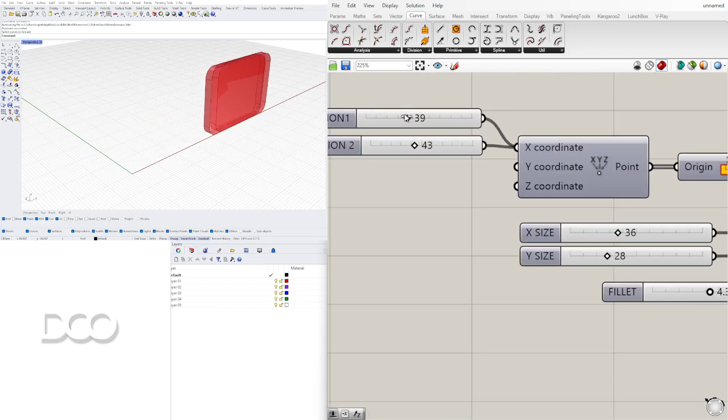In this video, I'll be showing those that have never used Grasshopper before and are intimidated and think it's a little bit scary, how to use it. I'm going to go over these super basic scripts and show you the power of parametric architecture and how it can be a super powerful tool for designing, and to see all of your options when creating 3D models. Hopefully you find this useful. If you see anything or have questions critical to this tutorial, let me know. This is something I want to build upon and share with other people to get them started so they can become familiar with the process of parametric design and architecture.

To start, I want to talk about the fact that the more knowledge you have inside of Rhino in terms of modeling or drafting, the better you will be inside of Grasshopper, in the sense that all the things you see here, like creating a line, a circle, a rectangle, are available inside of Grasshopper also. But if you don't know how to use them inside of Rhino, it's a little trickier to understand how to get them to function inside of Grasshopper. That doesn't mean you can't play around inside of Grasshopper and learn new things that you can then translate into Rhino. So it kind of goes both ways, in the sense that one thing you learn on one side helps you understand 3D modeling in general a little bit better.

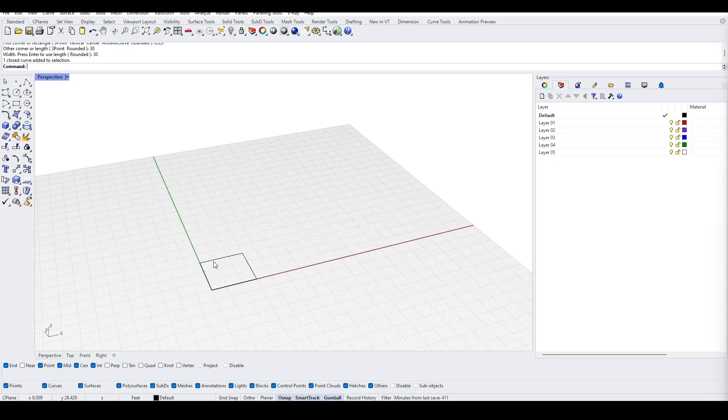So I'll take this and use the gumball. If you don't have that on, click on this and you'll be able to drag that arrow to move this to the side. Now we can go into Grasshopper mode, and let me show you how to create this rectangle here inside of Grasshopper.

To open up Grasshopper, go inside of Rhino and on the command bar type in Grasshopper, or you can go to this button here that launches Grasshopper. Once you do that, you'll see a file and there will be some default files for you to open. Just go ahead and go to File, New Document, and you'll see something like this. Now, as you can see, we basically have an open space, but this is different than what we see inside of Rhino.

We don't have a coordinate system inside of Grasshopper. All we have is this blank space, but this is going to function as the logic of the buttons and icons that you see in Rhino. They're created here, and this way it can be created parametrically.

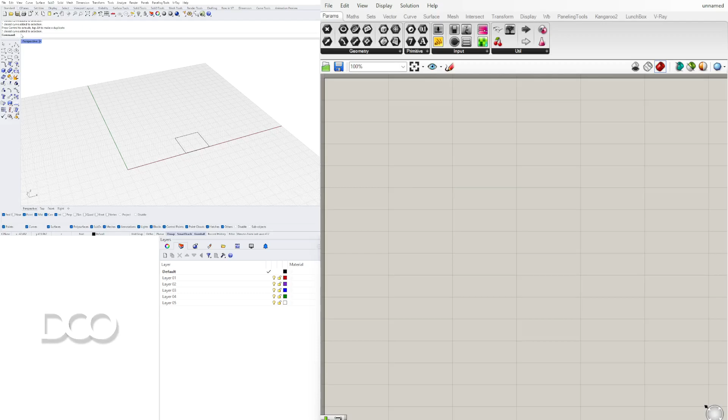So the first thing we do, in the same way we did it in Rhino, is double click, which is the way you basically type in a command. In Rhino, you type a command or click a button; here, the way to do that is double clicking on the blank space. Now we can type in rectangle, and I can bring in this rectangle component.

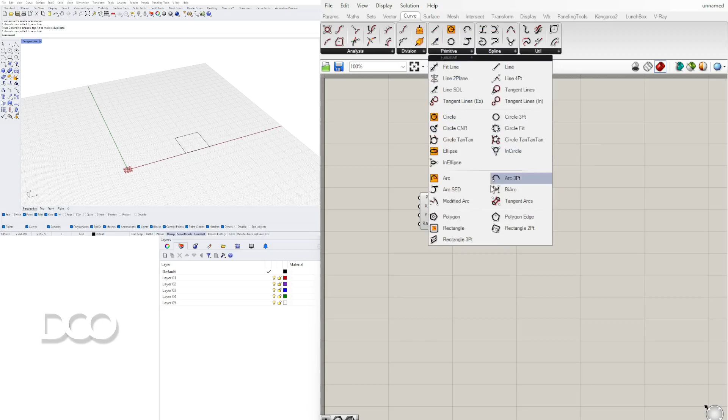Or I can cycle through the different tabs, which give us different aspects of geometries and transformations we could do. We want to look for curve, primitive, and rectangle. So in the same way that inside Rhino we can look for an icon and click it, or type in the command, here we can double click and type the command, or go into a tab like curve—two-dimensional curve—primitive, meaning the basics, and rectangle, which is going to be this component.

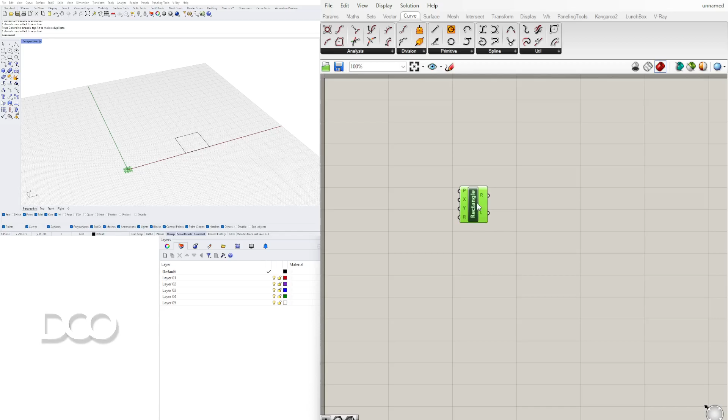Now there are different ways to view a component. First, I'll disable all of these, and you'll see the component just says the name and has one letter for the input and one for the output. This is okay, and sometimes necessary, but in my opinion the best way to display it is enabling all the draw icons, fancy wires, and full names. This way you can actually see the icon of what you're doing, and get a bit more information for the input and output.

Now that we have this component, notice we have these inputs and outputs, the same thing we have when we click on an icon. We have inputs, which is the plane—this is the location base plane, asking where we want to place it. Grasshopper by default will give you a default plane, the XY coordinate system, the same as the coordinate system inside Rhino. So the X and Y are the same that are plugged in here.

Now we can change that—we can bring in an XZ plane inside Grasshopper and change the plane, but by default it'll put it here. Now we want to change the size. Remember that for this rectangle we did 30 and 30, so let's do that here.

Now to plug in inputs, we can either right click, set domain, and change the size, or we can bring in a slider. A slider is really important here for parametric design, because it gives us a range of numbers we can change. So if we have X and Y, let's plug in 30 for X and 30 for Y.

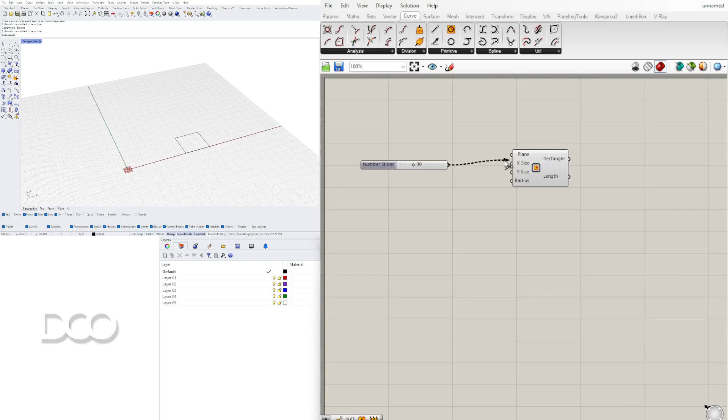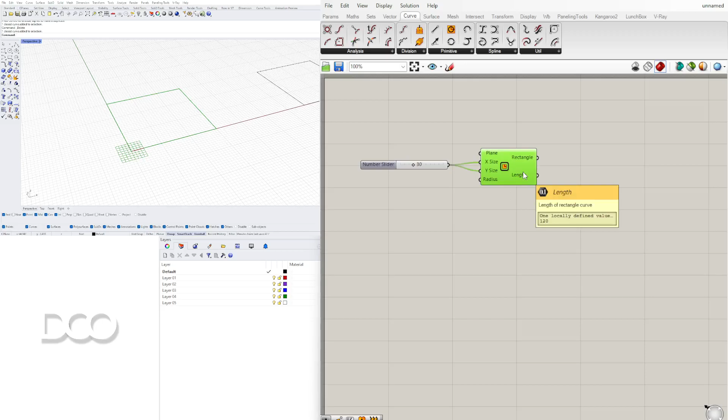Notice that we've basically recreated that rectangle here inside Grasshopper. The only difference is that when you select this, it turns green, and when we go to our Rhino file and look in the viewport, try as hard as I can, I cannot select it. This is because when you've created it parametrically inside Grasshopper, technically it's not a completed object, in the sense that it can always change.

So think of it as clay. Clay can be molded until it's baked, and once you bake it, it turns into the form it's supposed to be, where it won't be able to move.

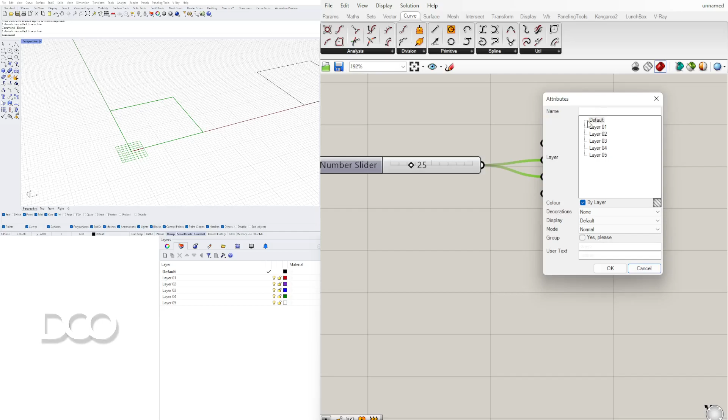So this is the same thing that we do inside of Grasshopper, where let's say I have a size of 25 rectangle. I can click this, middle click or right click, and bake. Then it's going to ask me which layer I want to put it in. I'll just put it in the default layer. And you'll see that now I can actually click it and move it. That's the power of Grasshopper, that you can bake iterations. So now I can just move this around and then bake it, and move this around and bake it, and just have iterations of different options just by moving a slider.

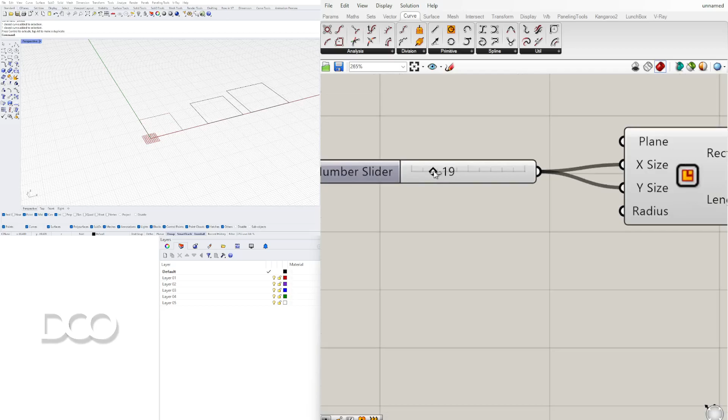So that gets you started with how Grasshopper works, in the sense that I just wanted to show you how components are brought in, how components work in relation to Rhino. From here, there's a lot more to be learned, in the sense that there are a lot of different components, and a lot of different ways to create numbers. But this is kind of getting your feet wet and not being scared or intimidated by parametric design, because in my opinion, it's one of the most powerful tools that anyone can use. So hopefully you found that useful, and I'll see you on the next video.

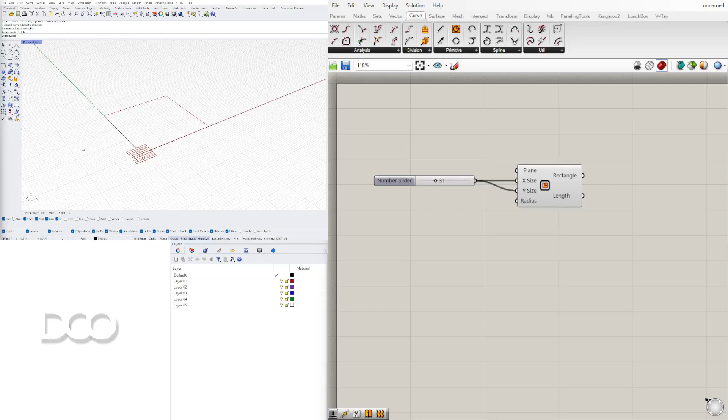So going further with this exercise, let me show you the next things we can do. Now that we have brought it in, we have given it an X and Y size. Now let's change the inputs. Rather than just one input for the X and Y, let's copy this slider and create a different Y size.

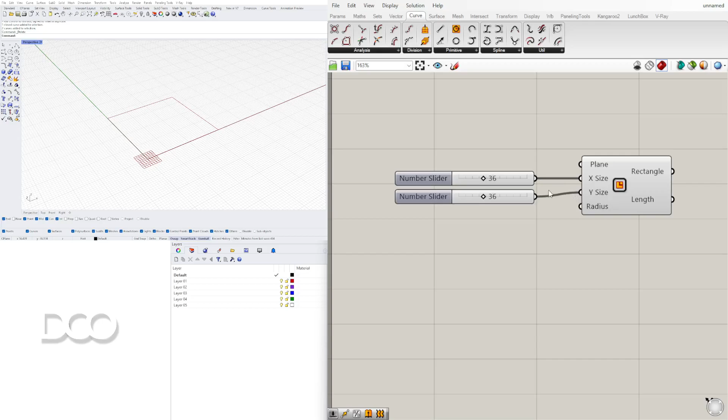You can take the slider, Control C and Control V to create a copy. You can also drag this down here and then tap Alt, or Option if you're on a Mac. This way you get two sliders, and we can now plug that into the Y and have two different dimensions for the X and Y.

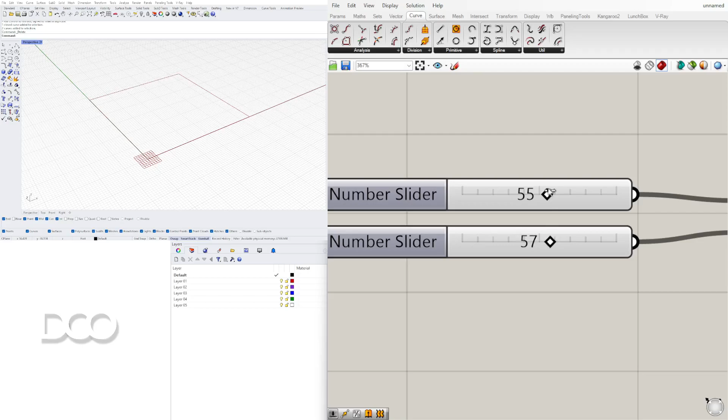You can also change the maximum and minimum if you want to limit the size to a specific amount. But now that we've created the size of this, let's change the name on the slider so we know what this does. Now that we have the slider of 35, we know that's the X size. So we can right click on top of that and change the name, type in X size - I use caps, but that's just a personal preference - and I'll do the same here for Y size.

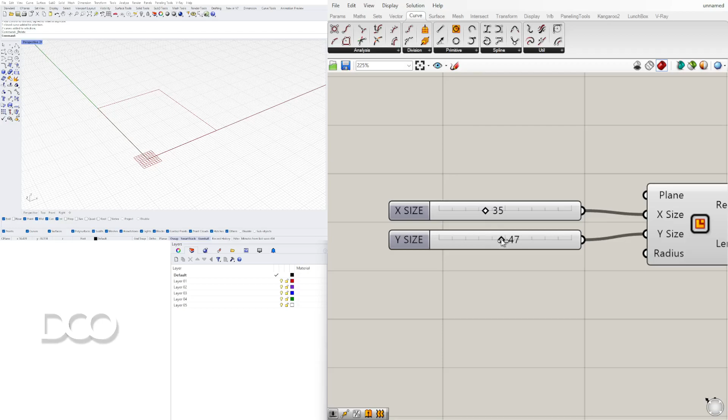The other thing you're going to see is that when you bring in components, you don't have to use all of the inputs, but there are some critical inputs that you need to use for the component to work correctly.

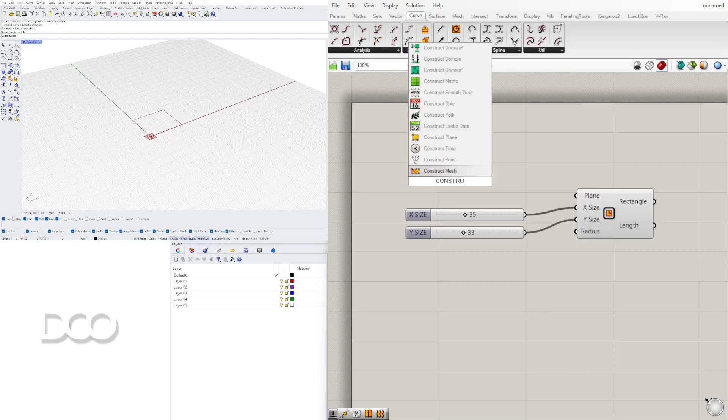So what I do is, for this one it gives you a plane, world, X and Y, but we can change that location. Let's say you have a plane, X and Y, and we want to move it to X, 70. This is where we'll create a point. So I'll double click here and go to create point, or we can go to construct point. This way it's going to create a point, but it's going to ask us to input the X, Y, and Z. So we know that we want to move this in the X direction.

And this is important, very important: be aware of your coordinate system. This is positive X, this is positive Y. So we want to move it in the positive X. This is where we'll take a slider and create it here. So we'll double click here, go to 70, and plug that into the X. And as you can see, it creates a point at that location.

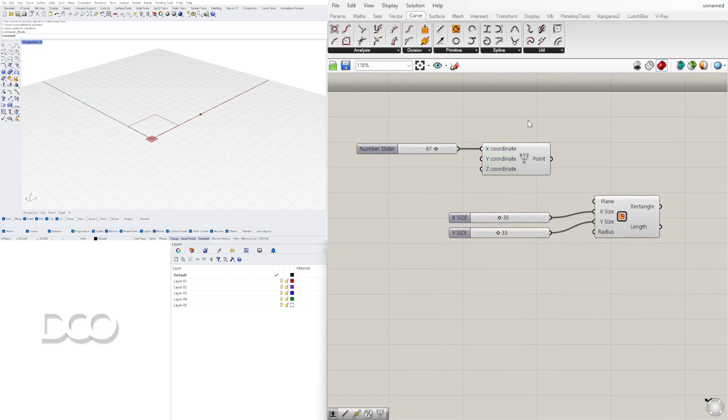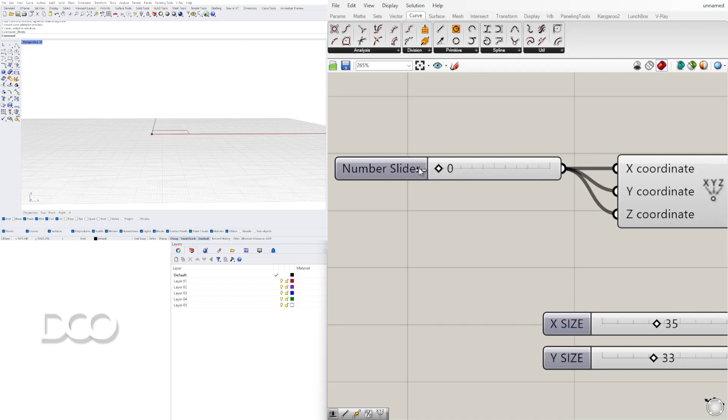Now we can plug in that point into the plane and see that we've successfully moved it in the X direction. Now if I plug in both X and Y, you'll see that it will actually move it diagonally, because when you have X and Y, it's actually a slope. And in the same way, if you do a Z, it's actually moving it up in that direction. So this is how you can change the location of this plane by changing the input of its location.

Now, this point - say we move it here - but it says X, Y plane. Why don't we change it to a plane that is X, Z?

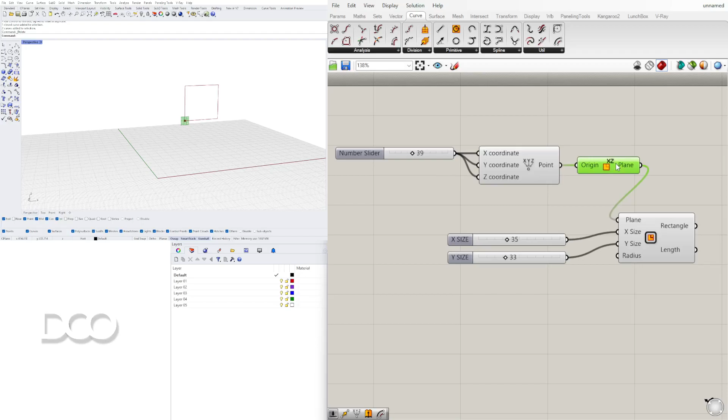So if I double click here and bring in a component, X-Z plane, we'll see that this component has one input and one output. The input is the origin point we created earlier, and it creates a plane that can be plugged into this plane input. Notice that it's actually created not relative to the ground or the X-Y coordinate system, but off of the X-Z coordinate system, which is a component. So every component, we can use this reference plane as an input.

So I just wanted to show you some of those aspects of basically referencing multiple planes and changing the location of that.

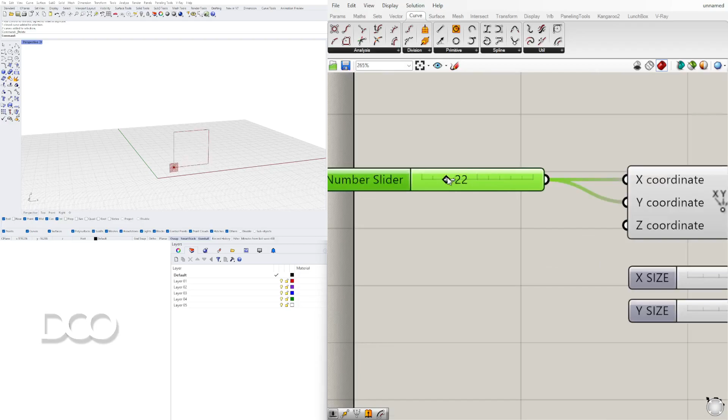So at this point, what we've done is change the origin point. We can unplug components, inputs and outputs, by bringing this back out and holding down Control, and you'll see a negative sign, which means it will remove it. Now it only has the X and Y. We can remove the X and just have this.

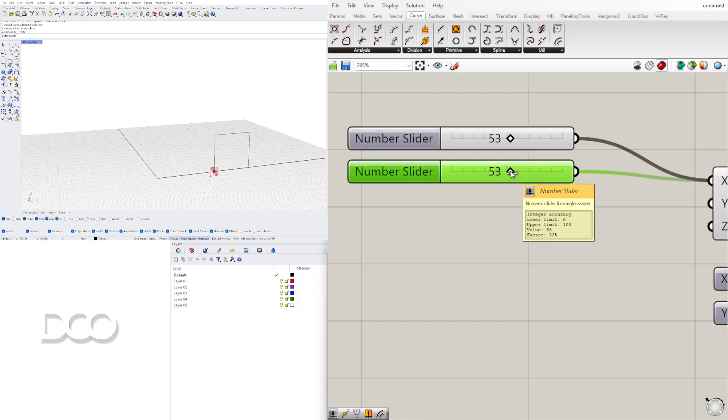Now, in the same way that we have one input in the X, let's say we want to take this and create two rectangles. We can copy and paste this, and holding down Shift, we can add more inputs to one input, which means we can create two rectangles by putting two inputs into the point that then creates the reference plane that is then creating the rectangle, which we can change the size of. So all of this is tied together parametrically.

And lastly, for this exercise, we can change the location here. So this is going to be the name of location 1, and this will be location 2.

Lastly, when we have a rectangle, notice that we have some outputs here. Not only is it important to be aware of the inputs and the information we put in, we also need to be aware of the outputs and the things that come out. So with this component, we have a point that comes out, and this is why we have 2 points, because we have 2 X coordinates plugged into the sliders.

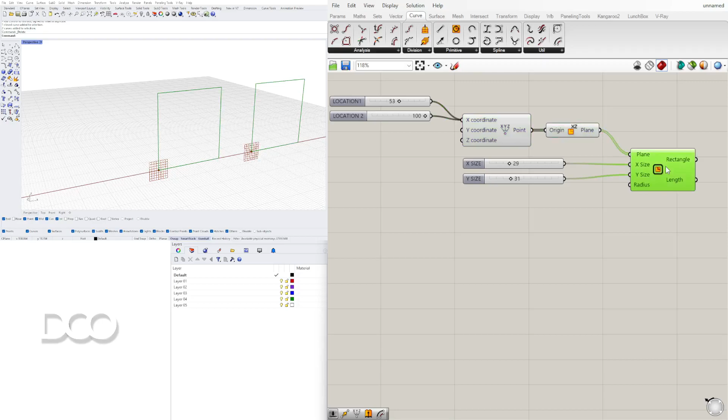Then that point creates the origin plane, where we then have this rectangle. This rectangle will give us an output, which is the rectangle, which is what we see, and also a length. When you hover over an output, you'll see information regarding that output. For this one, it says 2 locally defined values, a rectangle giving you the width of one of the rectangles, and then the second giving you the width and height of the other rectangle.

The length is going to give us the length of this rectangle and the length of this rectangle, and sometimes that's important depending on what you're trying to do.

So with that, let's go to the radius, and sometimes it'll say radius and you'll be like, what is it asking? When you hover over the input, it'll say rectangle corner fillet radius, which means it's going to round off the edges. So let's go here, double click, and this is where you can also plug in a decimal value. I'll just go here to 3.50 and plug that into the radius.

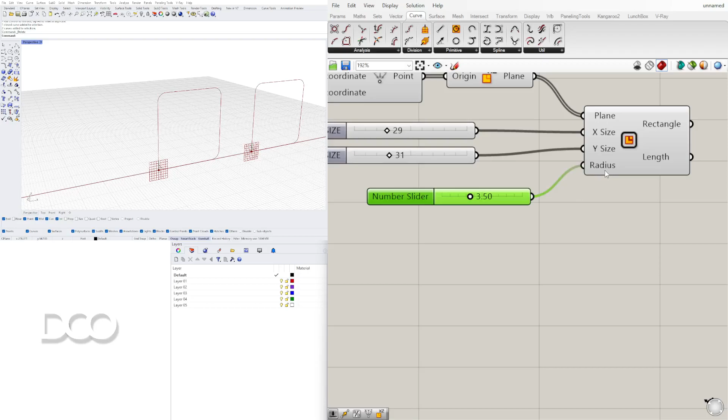Notice that when you do 2 decimal points, it'll give you a slider with 2 decimal points. But when you pick a number between 0 and 10, it'll give you a minimum and max of 0 and 10, and place that number there. When you do a number larger than 10, it'll create a range between 0 and 100, and so on.

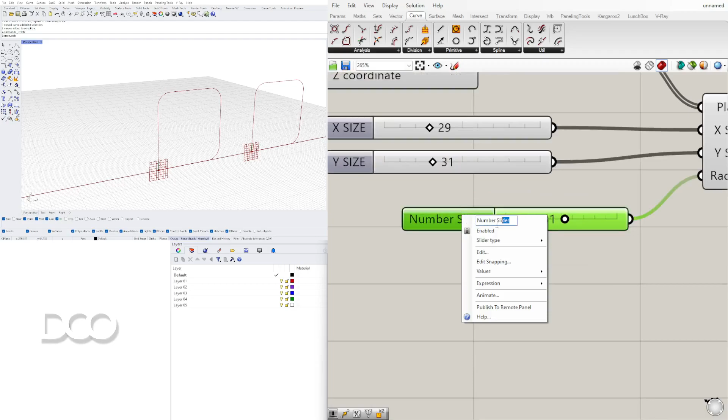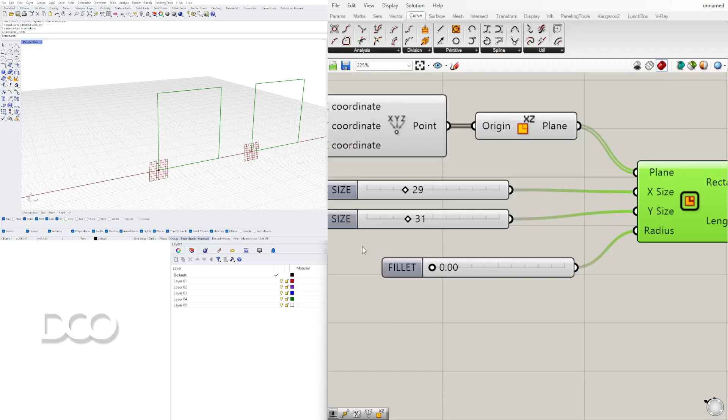With that being said, let's change this to fillet. This is another way we can round off the edges or further change the output by plugging in a different input for the radius. You can always go to 0 and have a perfect rectangle, but as you can see, it's good to see how all of this is tied together and how it works parametrically.

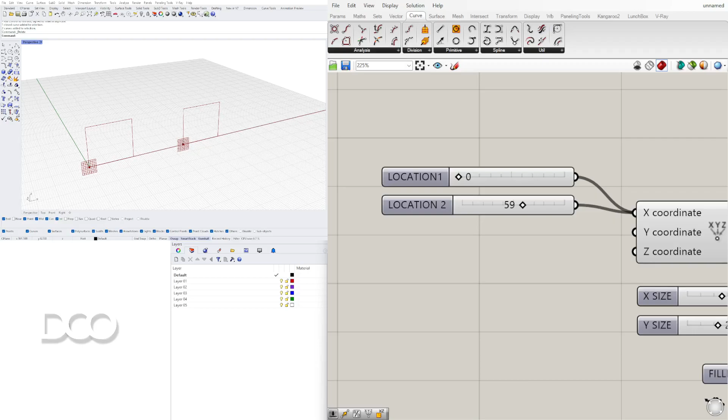And these are the basics of what we're working with in parametric design. We're working down to the basics and back to understanding the origins of how things are created.

And from there, understanding that this is not necessarily a linear process where you go from beginning to end. You can always change the inputs, therefore it's not a linear process, more of a spiral coming back into the process.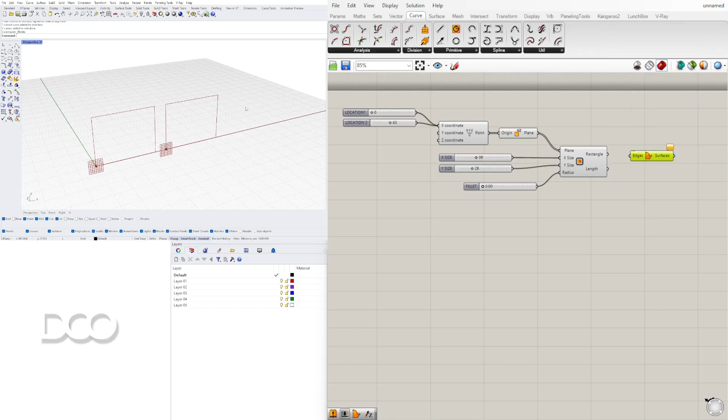To create a surface, the component we are going to bring in is called boundary surfaces. I'll double click here and go to a component, boundary surfaces, which will create a surface along a closed polyline. So this rectangle is going to be our closed polyline, and we can use that to create a surface.

Notice that our previews are always in red. These are things that can be changed if you go to display and other settings, but by default you will see that they are red.

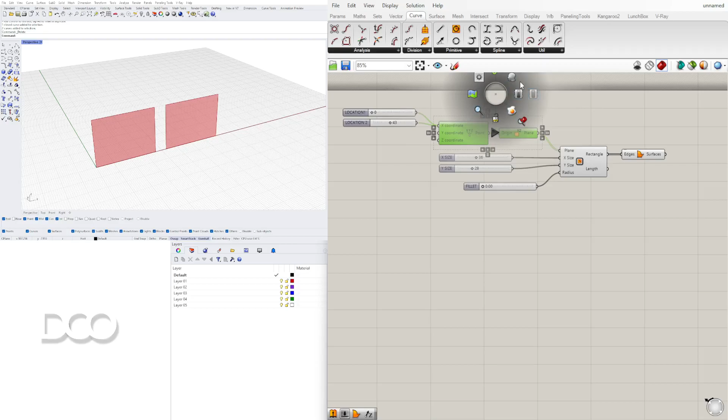You'll also see a checkerboard pattern, which is actually a reference plane. You can right click and disable preview so you don't have to look at those things if you don't want to, and only preview the things that are important to you. Right click, disable preview, or select it all and middle click to do the icon that hides everything. On a Mac it's not middle click, it's the spacebar, to get the radial options so you can disable the preview. Now that we have this surface, that was fairly straightforward.

Just make sure that if it's going to create a surface, it has to be planar, meaning it has to be on a 2-dimensional surface. It cannot be anywhere outside of that. There are other ways to create a surface, but with boundary surfaces, it's only going to work on a 2-dimensional flat boundary curve.

With that, let's take this and extrude it. When you bring in an extrusion, double click here, extrude, and we'll extrude this surface. So plug that into the base. Notice that the input doesn't say surface, so you might think it won't work, but the base is just a geometry input - you can extrude surfaces, curves, things like that.

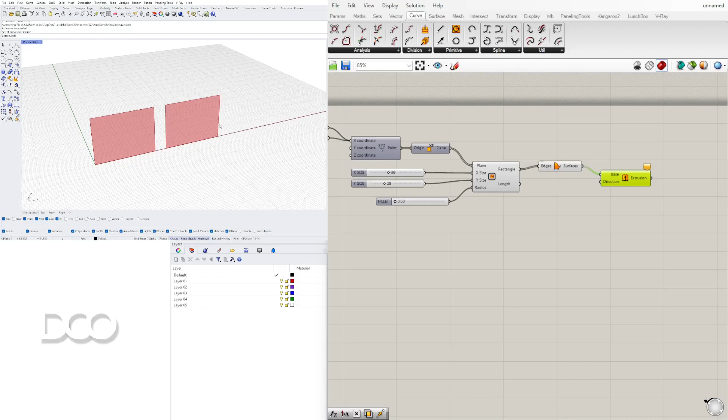It's going to ask for a direction, because in the same way that inside of Rhino, if we type in extrude, it's going to ask what curve and in which direction. Sometimes it does up, sides, and you can change the direction. We need to be aware that these rectangles are actually aligned in the XZ plane, so we actually want to extrude these in the Y direction.

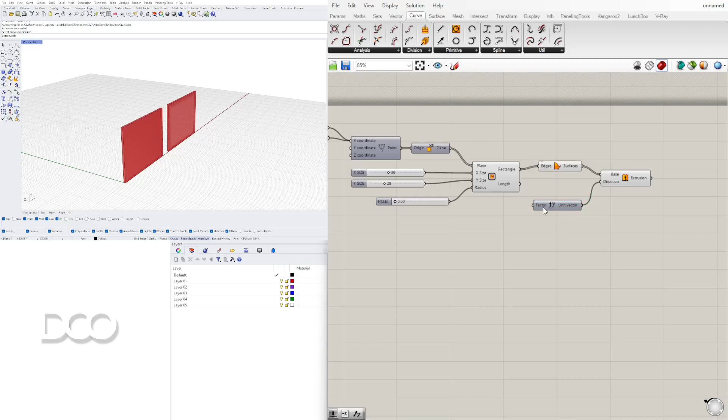This is where we'll double click here and bring in a unit Y. I'll just click on Y and it'll bring in the option for unit Y. Let's bring that in. By default, when you bring in a vector, the input's going to be 1. So let's change that by changing the input. Now I'll take this and copy it, slide it here, tap Alt, and change the name to extrude.

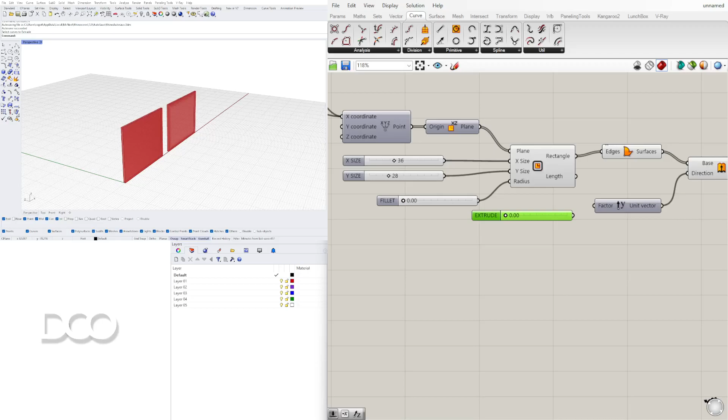Now let's plug this into here. Now it's extruding by 0. Now it's extruding more.

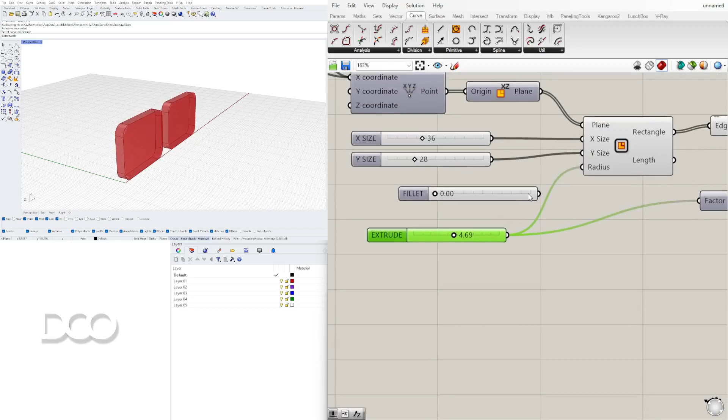What's cool is that you can also do something like this, where you can say whatever radius - these are some of the things you can type parametrically, which I feel is kind of the cool thing, to have that ability to change things to see if they look good or not.

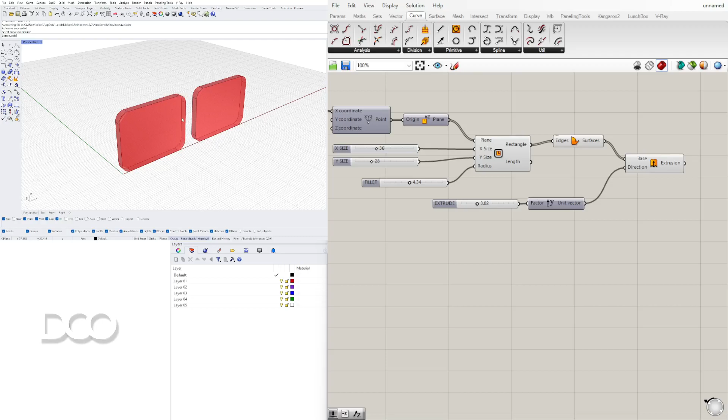And with that concludes the overall getting started lesson. If you notice something I didn't go over, or got stuck somewhere, please let me know. This is something I want to build on and help new people get started using parametric design. It's a little intimidating at the beginning, but like I've said before, it is some of the most useful things to understand and get used to if you're trying to do architecture and things like that in the future.